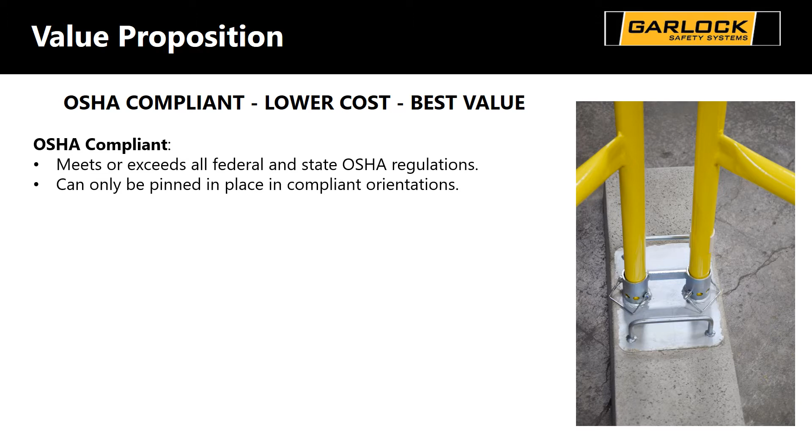The Set and Prevent base is tested to meet all federal and state OSHA regulations and standards and is third-party certified. We also made it foolproof, meaning the base can only be pinned into place in correct compliant orientations.

Lower cost is achieved by high volume production processes and natural materials that allow us to produce a base at a fraction of the price compared to our traditional metal base. We're also lowering the cost of safety by offering an inexpensive optional form-fitting rubber pad for delicate roofs.

At the time of introduction, the Set and Prevent base will be priced 27% less than our traditional metal base. All of this adds up to the best value in the industry. It delivers 95% of the benefits of our traditional metal base, but costs 27% less.

If you look at the traditional equation for a value proposition, it's benefits divided by cost. Our traditional metal base delivers 100% of the benefits at 100% of the cost, and its value integer is 1.

If we look at the Set and Prevent base, we deliver 95% of the benefits divided by 73% of the cost, equals a value integer of 1.3, or 30% more value in the Set and Prevent base than our traditional metal base. So this provides a great value for long-term Set and Prevent applications on rooftops.

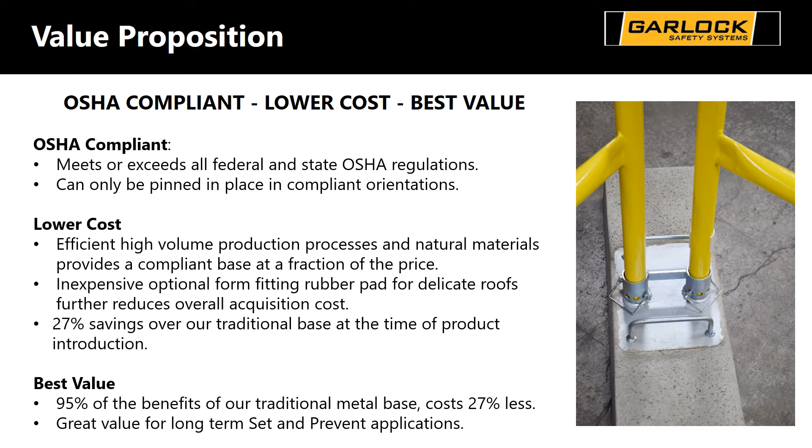Now let's cover some of the product details. The new innovative Set and Prevent RailGuard 200 base is made from a special blend of concrete.

It's similar to a lot of other outdoor concrete products we see around us every day - retaining walls, cinder blocks, bridges, roads, curbs, and so forth.

It does use a unique casting process that results in high efficiency, lower cost, and high performance. And this combination results in high density and an 8,500 psi breaking strength.

The block is internally reinforced with rebar. It has 2 posts to accept standard RailGuard 200 railing. And we're offering an inexpensive optional black rubber pad.

One thing you'll note that's sort of unique is that we provide 6 channelways or weep holes in the pad itself for any collected water to drain away. There's also 2 weep holes in the block itself that allow that water to drain away.

We want to make sure we eliminate as much standing water as we can on our roofs, to prevent mosquitoes from hatching, bacteria, and so forth.

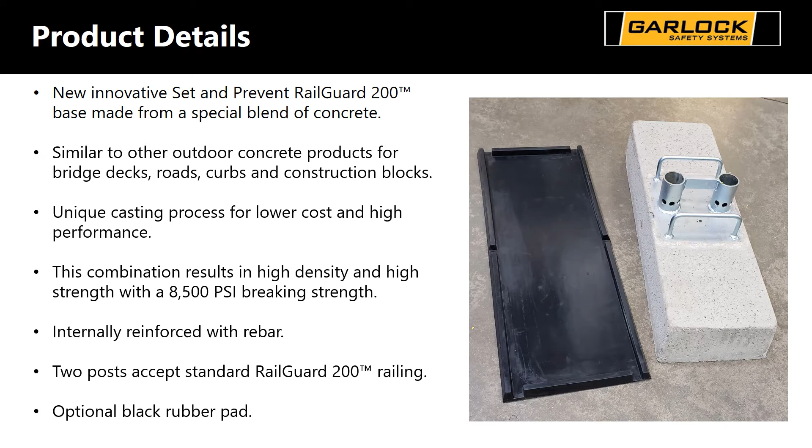Now let's continue with some additional product details. It weighs 103 pounds compared to 90 pounds in our traditional base. It's fully OSHA compliant for both state and federal OSHA standards and regulations, and third-party certified.

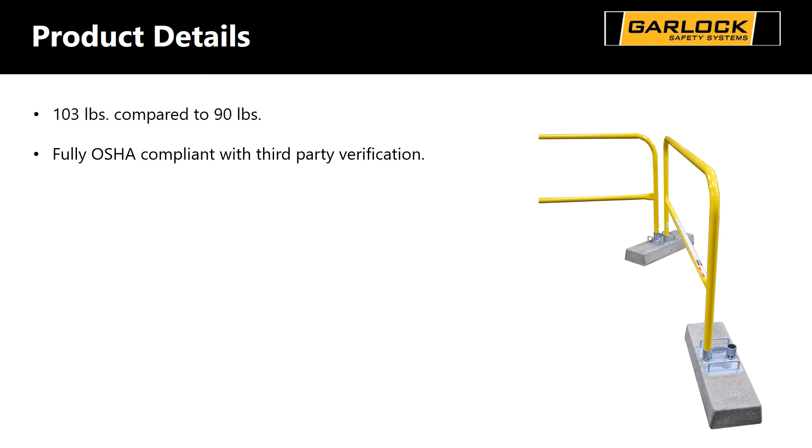It's made in the USA. It uses galvanized handles and post holes for lasting durability. It has 2 3/8-inch diameter handles for easy carrying and lifting.

Rails attach into the post receptacles for both straight runs and corners. And it's compatible with our base transporter.

That little piece of metal bridging the 2 posts together is where the base transporter hooks on, allowing it to be lifted entirely off the ground for easy transportation and positioning. So we can hook on the base transporter, wheel it across a parking lot or a roof, and put it in place.

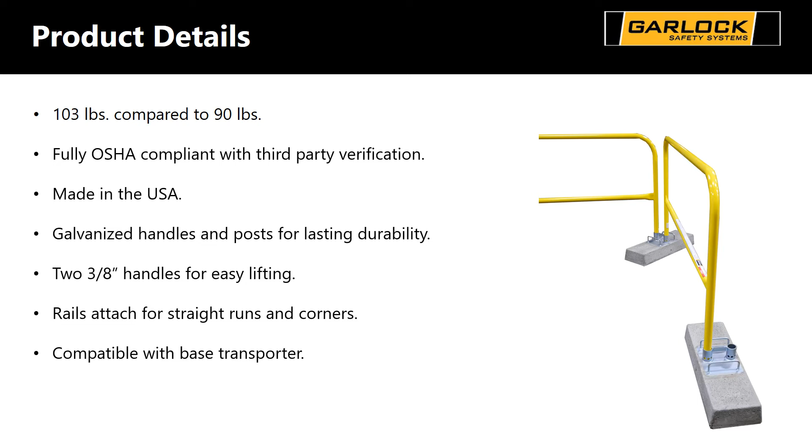Now let's cover the product specifications. As I mentioned before, it weighs 103 pounds each. It has a galvanized steel insert with thick galvanized plating for long-lasting durability.

It carries a 1-year manufacturer's warranty against defects in materials and workmanship. It has a natural stone color as well as a galvanized silver finish.

The base itself is 29.5 inches long, which results in a 2-inch additional rail setback compared to our traditional metal base, as well as a 5-inch additional base setback.

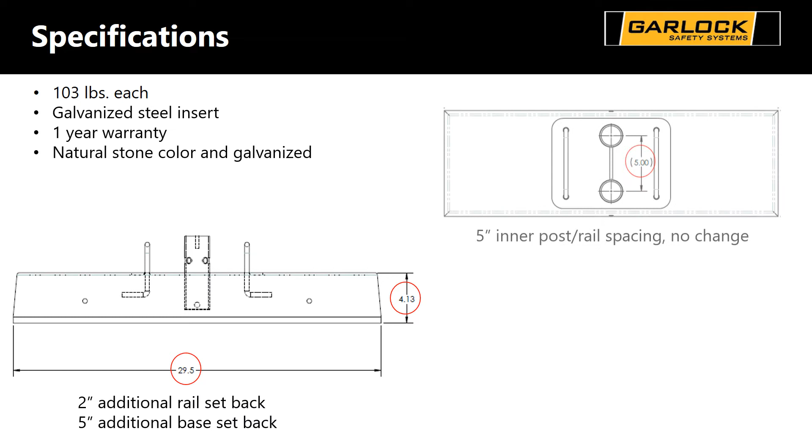It has 5-inch inner post rail spacings, no change from our current metal base. It's 9.5 inches wide and 4.13 inches tall for the base itself, a total height of 7.13 inches.

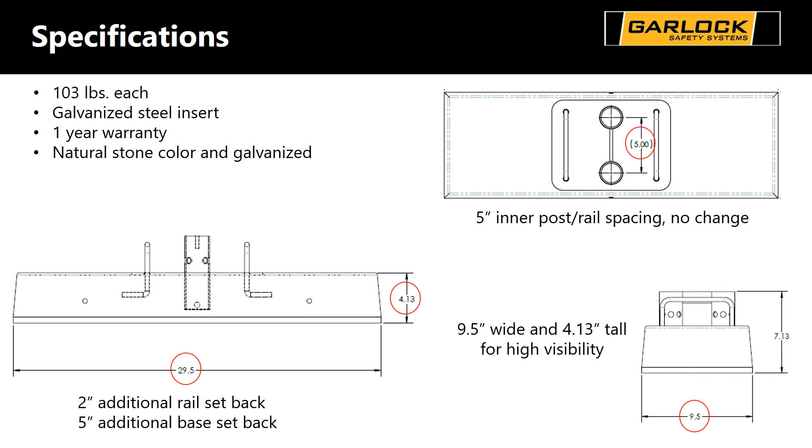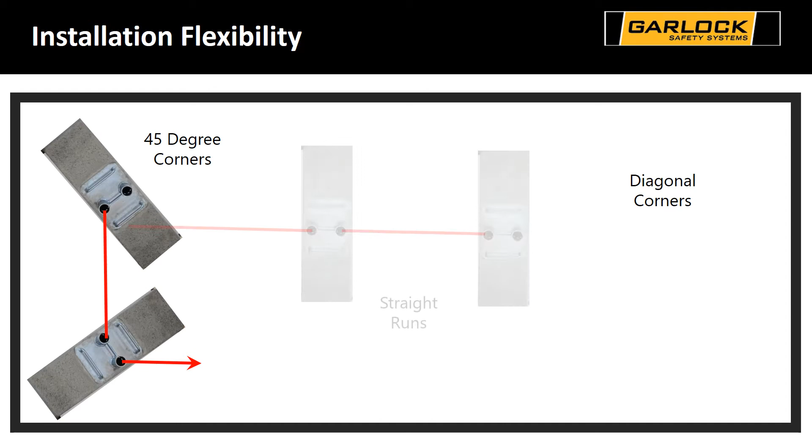Now we can review the installation flexibility. We can make 45-degree corners by putting the base right in the corner at a 45-degree angle. Of course, we can do straight runs as well.

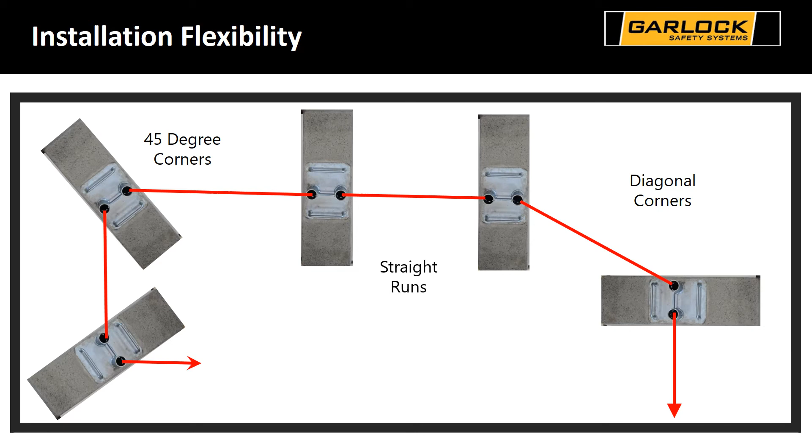We can also configure to do diagonal corners, as shown here. And if we're going to wrap a piece of equipment or put it in a non-closed loop system, outriggers are still required to be OSHA compliant.

Now let's look at some other great applications for the Set and Prevent base. The first one is coming soon: an Everlast 200 warning line system that uses Set and Prevent bases, metal stanchions, and plastic pennant lines to create very price-competitive permanent warning line systems.

Another great application is for low slope standing seam roofs. Typically those standing seams are between 18 and 24 inches wide, and our base and pad is 12 inches wide, so it fits right in between the two standing seams. The only thing to take care of is making sure the spacing is laid out properly so all of the bases fit in between the seams. Sometimes that means ordering a different size rail to accommodate that spacing, or an adjustable rail where we can slide the rail, making it longer or shorter to accommodate the seam spacing.

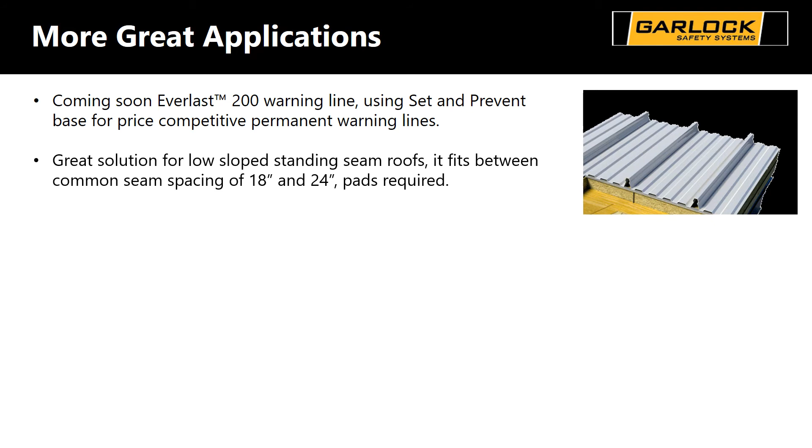Another area we're investigating is social distancing and crowd control, and pedestrian traffic guidance control systems. Its long narrow profile lends itself to being in this orientation to provide pedestrian guidance and traffic ways.

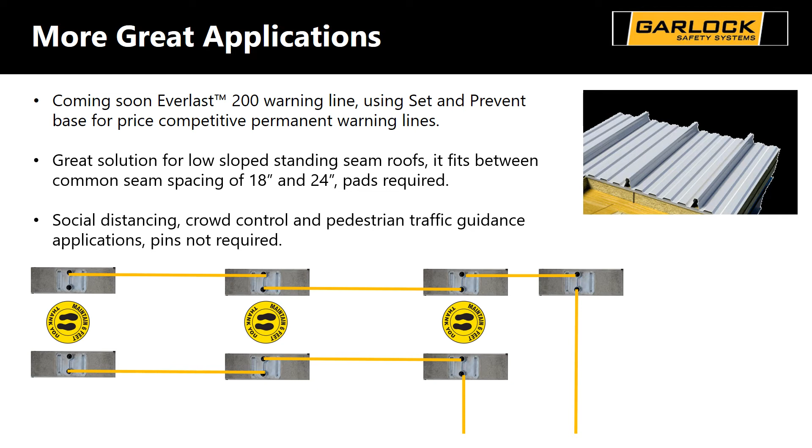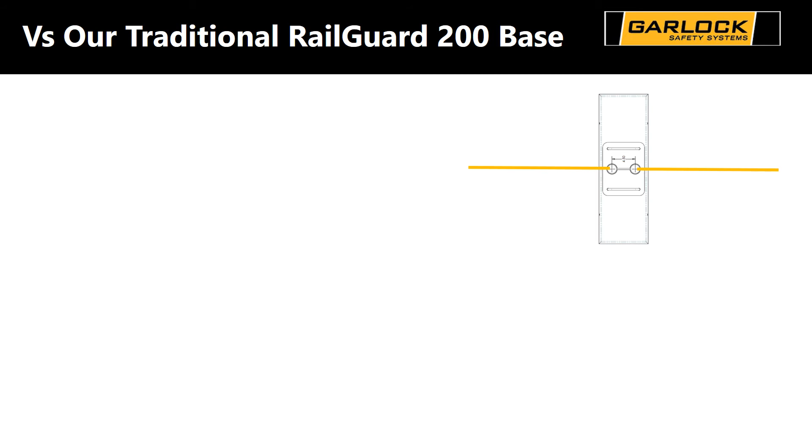Now let's compare the Set and Prevent base to our traditional cast iron RailGuard 200 base. Earlier in the presentation, I talked about the fact that the Set and Prevent base delivers 95% of the benefits of our traditional metal base. Let's look at what some of those differences are.

The first one is because the Set and Prevent base has two ports, you cannot make a T configuration. Normally this is not an issue, since we're just not making that many T's up on rooftops anyway. The one application where it does become important is for hurricane rated zones, where we're going to install a hurricane rated system. In those systems, if we have a long length of rail, every so often we need to put in a 5-foot outrigger to withstand the high winds in a hurricane zone. So in that particular location where we need to install a 5-foot outrigger, we would put in a single metal base where we can then have a T, come out with a 5-foot outrigger, and problem solved.

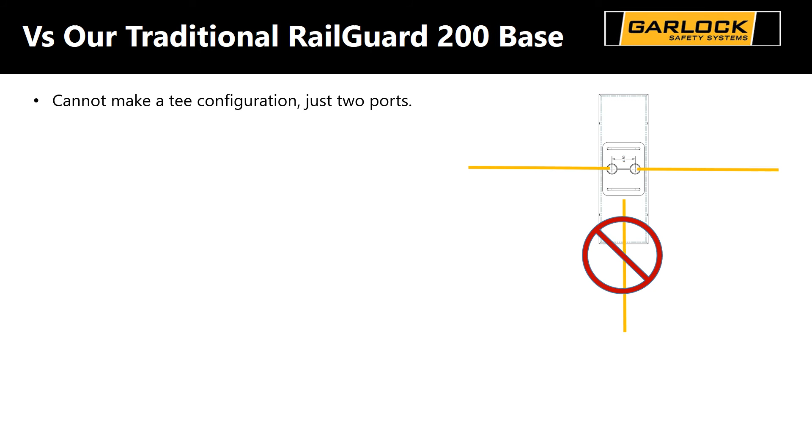It's also not compatible with our current InvisiRail adapter. The InvisiRail adapter allows the railing to fold down when people are not on the roof to provide a more aesthetically pleasing front to a building, as an example. It can then be folded down and becomes invisible from ground level. We are, however, working on a folding adapter for the Set and Prevent base, so we can have that same benefit of a folding rail with the Set and Prevent base.

There's no toe board option. The Set and Prevent base is designed for long-term set and prevent fall prevention solutions, and toe boards aren't required for those applications, so no toe board option.

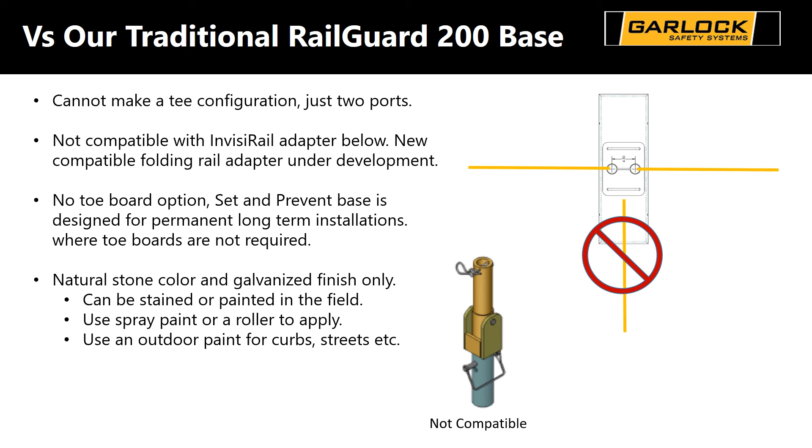It has a natural stone color and a galvanized finish only. Now it can be stained or painted in the field, so you could put some stain into a pump-up sprayer and spray it brown, mahogany, or some other color. You could also paint it, using a spray can or a gallon of paint and a roller. We'd recommend buying an outdoor paint suitable for curbs, playgrounds, streets, and street marking and things like that. If a person does have a need for some of these things that the Set and Prevent will not deliver, then those needs are best served with our traditional metal base.

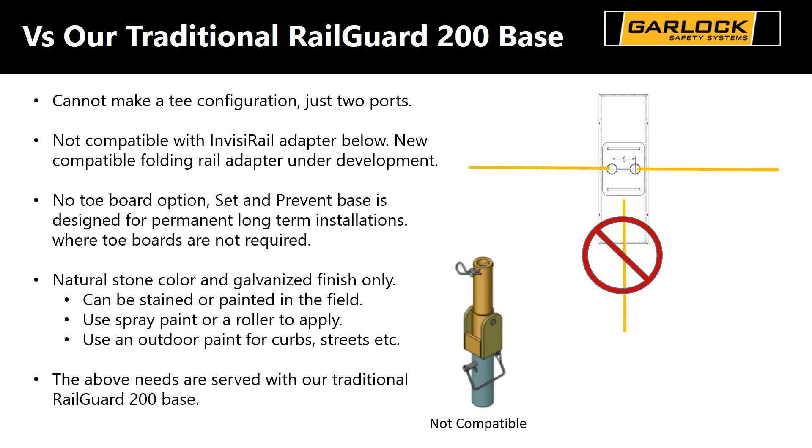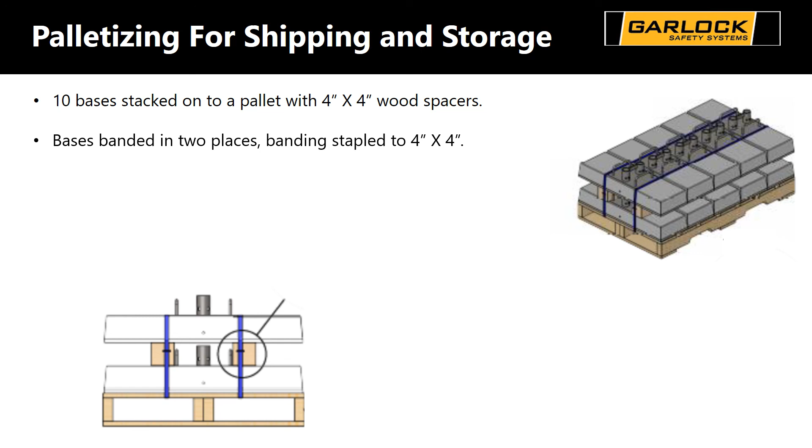These bases are then banded in two places, with the banding stapled to the end grain of the 4x4 to prevent the bands from slipping during transport.

A maximum of 2 pallets can be strapped together for shipping. So we build a pallet of 10 and band that, build another pallet of 10 and band that, then put one on top of the other and band those two packages together. This allows you to cut the banding when they arrive on site. We can remove the top pallet with no other rebanding necessary and ship it out to a job site or location, and we can do the same with the bottom pallet, again with no rebanding necessary.

For static storage, we can actually stack 4 pallets tall, so a total of 40 bases. This will then minimize floor space consumption in a warehouse, distribution facility, or something like that.

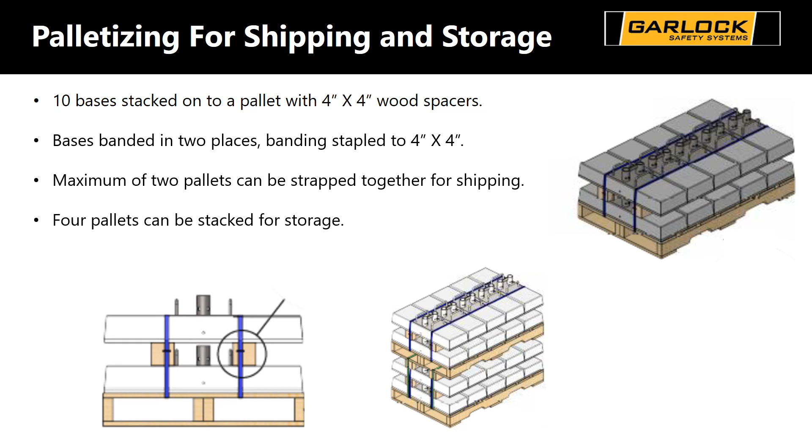So that concludes today's training on the Set and Prevent base.